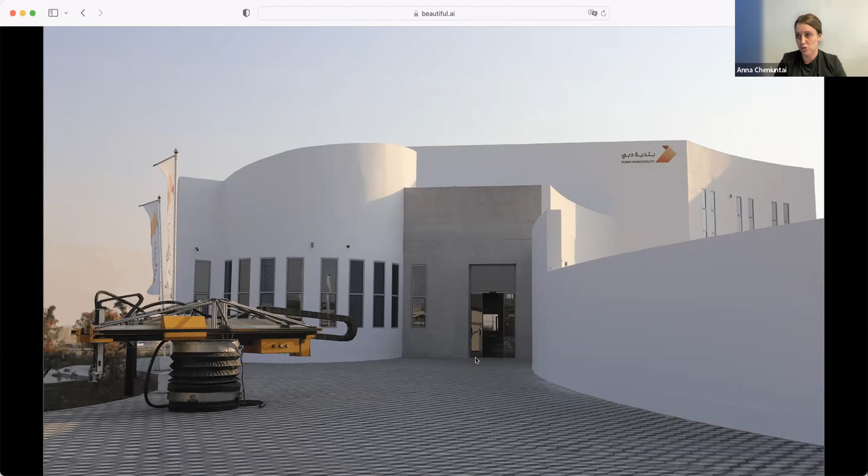This is another picture of that building in Dubai.

Now about the equipment that we have: we have a 3D printer and we name it Frank. As you see, Frank is pretty compact, comparable to the size of a human. It's not that huge gantry machine that you need a lot of trucks and like 10 people just to transport and deploy. In our case, one person can deploy the machine on the construction site and operate it to 3D print a house.

And you can see that this Frank looks a little bit different than the previous one that I showed in Dubai.

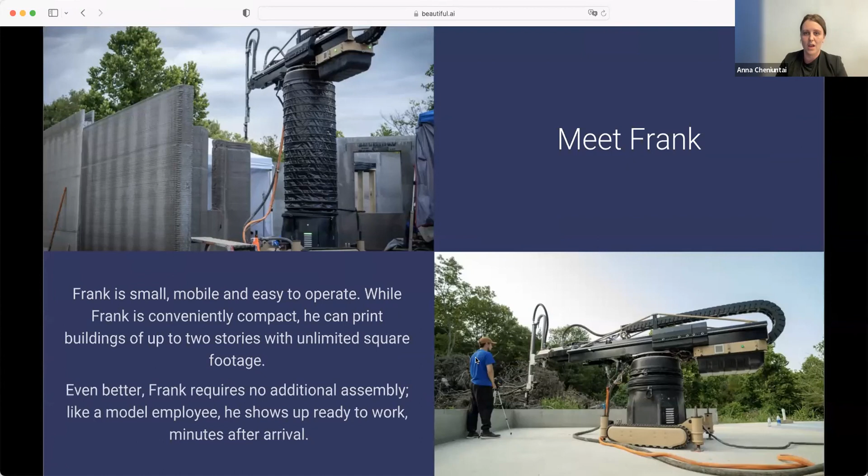Another piece of equipment is a mixer and pump machine, Gary. This is also proprietary equipment that we developed from scratch after our experience in Dubai, where we used a pretty standard plastering machine, and that was a nightmare. We realized that if you want to really scale this technology and 3D print a million houses, we have to create a special mixer for this technology. Otherwise, it will not be possible to scale it up. So this is Gary, and actually Gary right now also looks different. It's new Gary, I would say.

We're preparing right now for the product presentation in May or June when we unveil new Gary, Frank, and also our 3D printed model house. So a lot of things going on right now, and we're really excited to finally show everything pretty soon this summer.

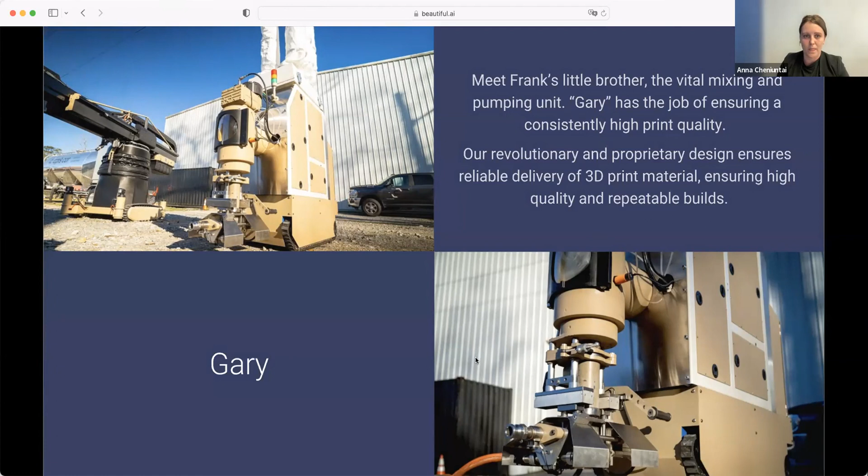Also, the really big difference from other equipment and other 3D printers in the market is our transportability and mobility of the equipment. This trailer and this truck are basically enough to transport Frank and Gary to any construction site, and it really takes like 30 minutes to deploy Gary and Frank on the construction site. So this is basically everything that you need. You don't need cranes, you don't need pallet jacks or a big 18-wheeler truck just to transport the printer. This is something we have been working really hard on, how to make this technology so easy to use. So it's basically kind of like a transportable tool for construction.

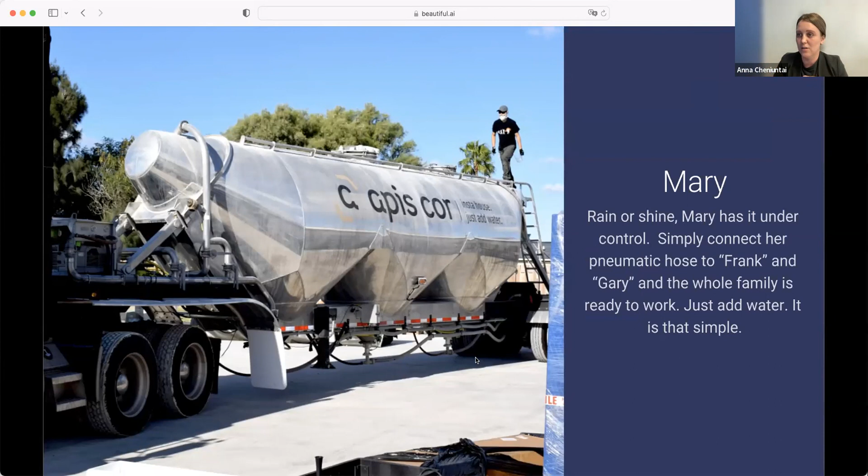And then another piece of our technology, it's Mary. Mary is a bulk truck that basically transports the 3D print material needed to 3D print the houses. Mary transports dry material, because 3D print material comes to the construction site as a dry substance, and then it's mixed with water in Gary, and then immediately goes to Frank. So these three pieces together basically represent a plug-and-play solution for construction companies, how to utilize this tool to 3D print houses and basically increase productivity, increase the quality of the builds, and also build durable houses.

I know that a lot of people also wanted to know about the 3D print material. The material we use is a cement-like mortar, basically concrete, but tweaked a little bit for the extrusion process, for the 3D printing process. It consists of cement, sand, and secret sauce, as we call it. The goal of the secret sauce is to make the material extrudable and at the same time durable, and have a fast setting time. So basically, this material is suitable for the construction 3D printing process, but also durable, so we can build safe and sound houses.

Also, the walls that we 3D print are reinforced, because I know everybody sees the walls and asks, where's the reinforcement? So we do reinforce the houses, and we do this the same way as it's done for concrete block construction. Trevor is the best person to talk about this later on.

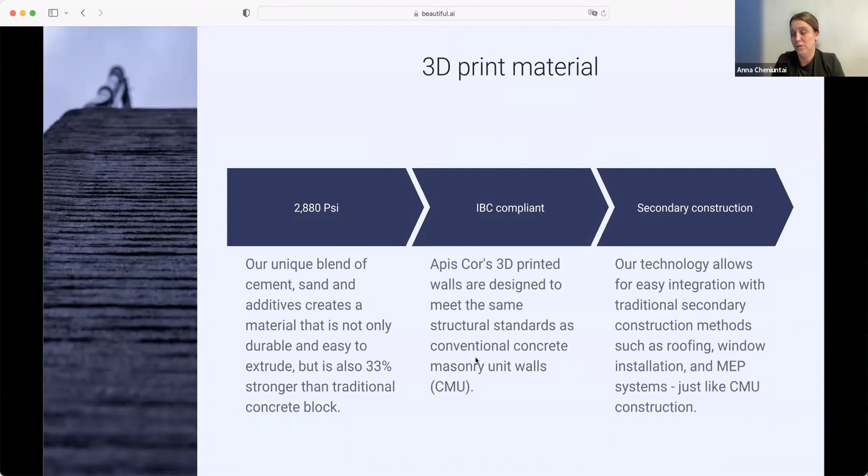This is also about the 3D print material. We did test it, and basically the walls that we 3D print comply with the building codes as for concrete masonry unit construction.

Now more about the market and the customer profile, and why we actually do this technology and for whom. Our customers are construction companies and home builders who really cannot keep up with the demand for new houses because they rely on labor, which is really limited today. We do know a lot about the labor shortages. It's also material shortages. So all of these factors today really make it hard for construction companies to build a lot of houses to keep up with the demand.

It takes a lot of time to build a house, a lot of cost, and the quality is not really consistent, so the budget and timeline are also not consistent and not predictable. These are some items that really affect the overall cost and timeline, and this is what actually makes construction so challenging and expensive, because all of the things change all the time and you cannot really control it. You cannot say, okay, this is going to take me 4 weeks and this amount of money. No, you can talk to your subcontractor yesterday and he provides you a price, but tomorrow he calls you...

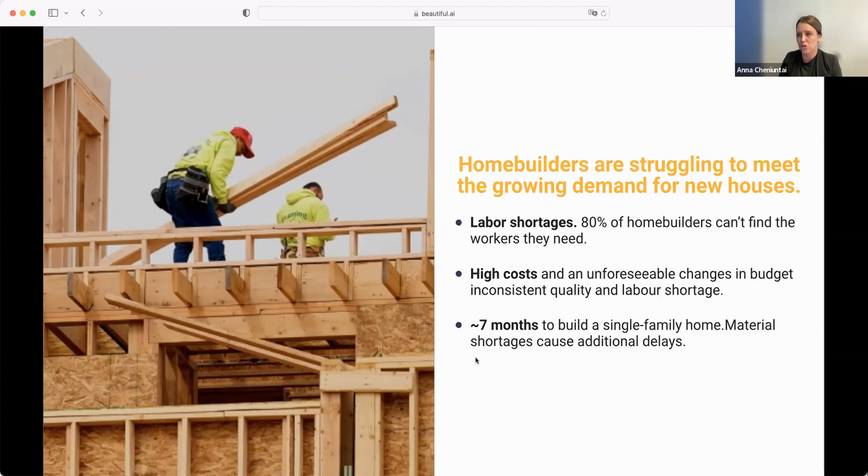...and says that his team cannot show up today, and he doesn't know when it's going to be continued. So construction companies just sit in this situation trying to fix it. It's a lot of hustle and a lot of problems with that. With the 3D printing technology, and especially the equipment and technology that we've created, home builders can build walls 9 times faster, and I'm talking about the walls.

If you expedite the process of how to build the shell of a house, which is the most important part—if you don't have a shell, you don't have a house, you cannot install roof, windows, work cannot start. So if we expedite the wall construction, the finished houses can be expedited three times. This is a huge game changer for construction companies.

For building the wall structure, we just need one person to operate the printer versus about 10 people of a concrete masonry crew on site to build the same structure. So it really affects the costs, operations, and time and management for that amount of labor, which is also not consistently available.

The complete houses can be cheaper up to 20%, but it really depends on the design, location, floor plans, and what exact finishes and materials you use. But it is possible to build a very decent, nice looking, durable, affordable house up to 20% cheaper versus traditional construction. And again, you just need a standard pickup truck and trailer to transport the printer.

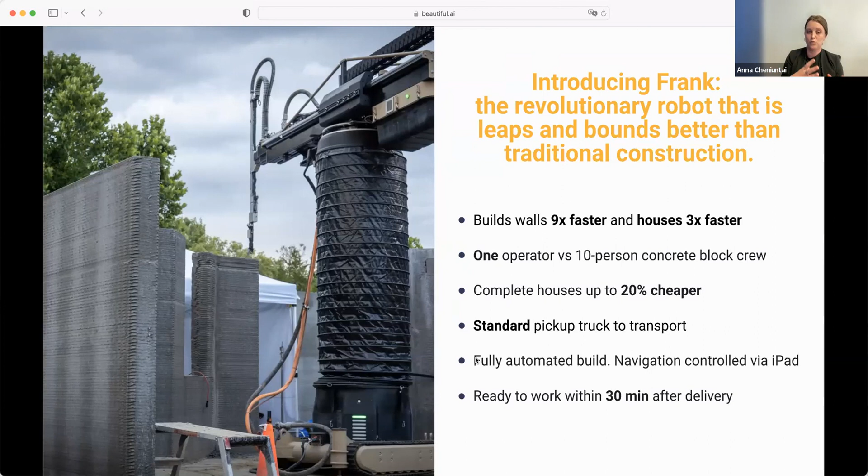Our printer is also controlled via iPad, so you don't need pallet jacks or 10 people on the construction site just to move the printer around. The printer is always assembled, so it comes to the construction site as an assembled piece, and within 30 minutes, it's ready to start printing.

Basically, by our technology, we bring automation to the construction industry. What also makes us different, and why home builders so far really like us, is that they're actually waiting for our solution to be available on the market, because they already did the research and understand the advancement of our technology and all the features that come with mobility, transportability, and ease of use.

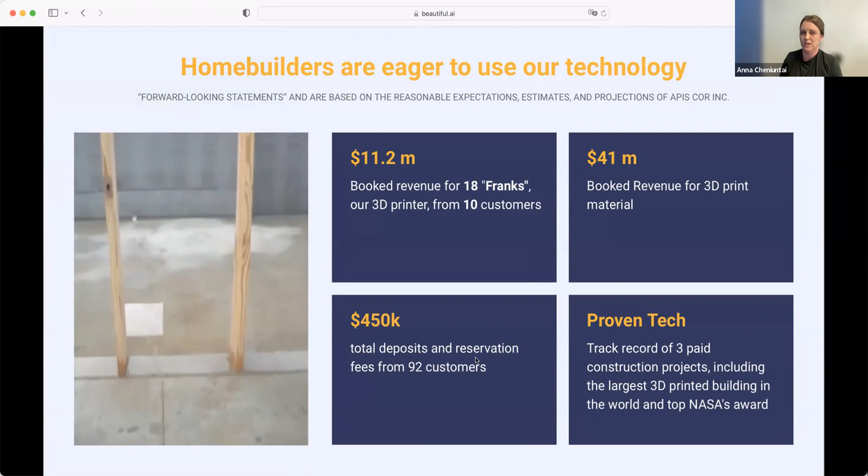Now more about the recent updates on sales and revenue potential. Again, these are projections—this is not part of the offering, and it can change anytime, it's not guaranteed, nothing like that.

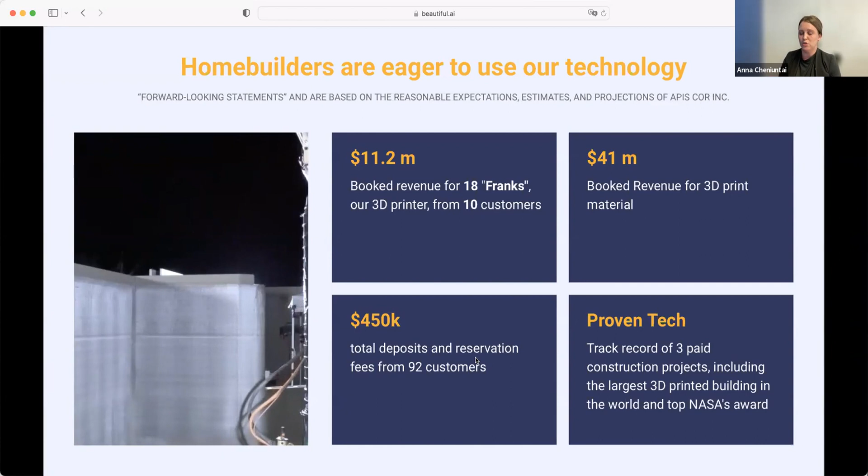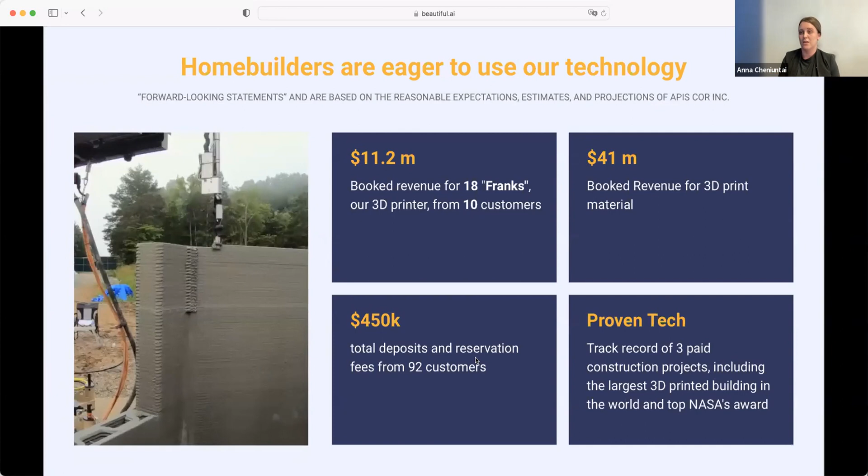However, we have been working hard to expedite the sales of our equipment. We started this in late January, mid-January, and so far we have received very good demand. Our customers are right now preparing their funds to place the order for the machine. They already did a lot of internal calculations and everything.

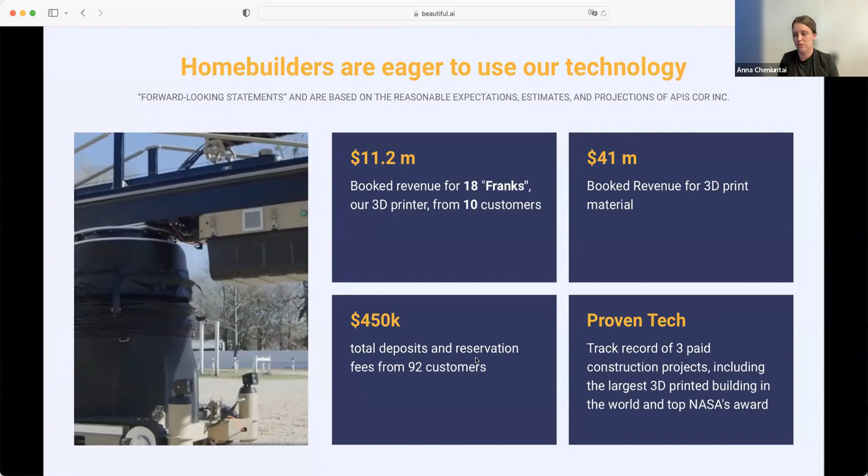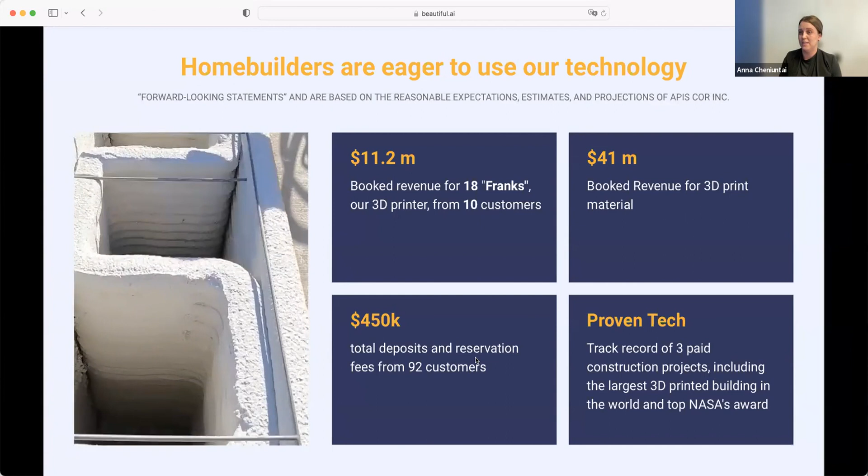So basically we have booked potential revenue for 18 Franks. And those people didn't just say yes, I will buy it—they put $3,000 of deposit for this machine, and they have to make the decision within a specific period of time. So this has been pretty solid traction so far.

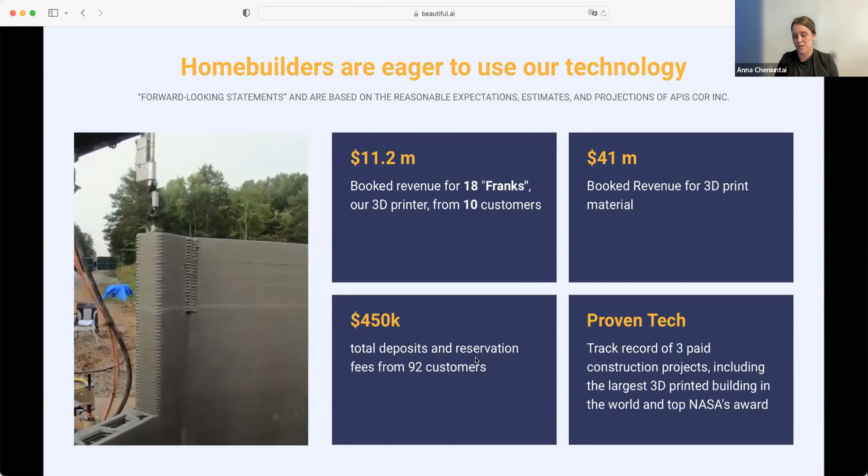But besides selling the printers, each sold printer brings revenue from the material that we're going to sell, because our business model is kind of razors and blades. Razors are the 3D printers, blades are the 3D print material. So every 3D printer sold or rented out brings recurring annual revenue from the 3D print material.

Approximately, if all these customers work even conservatively 8 hours per day, building let's say 3-4 houses per month, the potential revenue for that is $41 million. But again, it can change anytime, and it really depends on all the risk factors, and it's not guaranteed. Again, these are all projections we receive today based on the pre-orders and commitments from the customers.

Also for people who are new here, in addition to that, our traction also consists of the 2 buildings that we 3D printed in the United States so far, and also the paid pilot that will be converted to a commercial contract soon. So we have the proven technology. We already have the pilot projects with customers who put some money in before, just to have the reservations or priority for our product.

And those customers right now are being converted to actual revenue. So this is really exciting. This is proof that we don't just have technology that works—we have technology that customers want to purchase, want to use, and are pretty committed to making their orders and putting money in very soon. So this year is going to be pretty busy and pretty exciting for us.

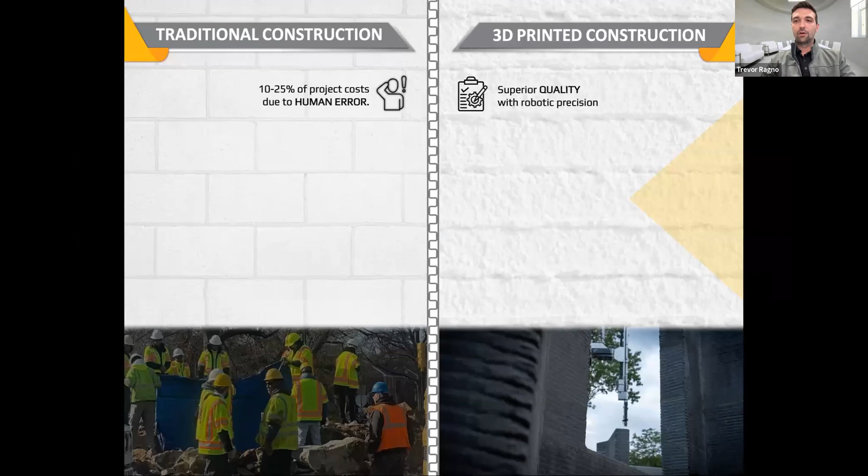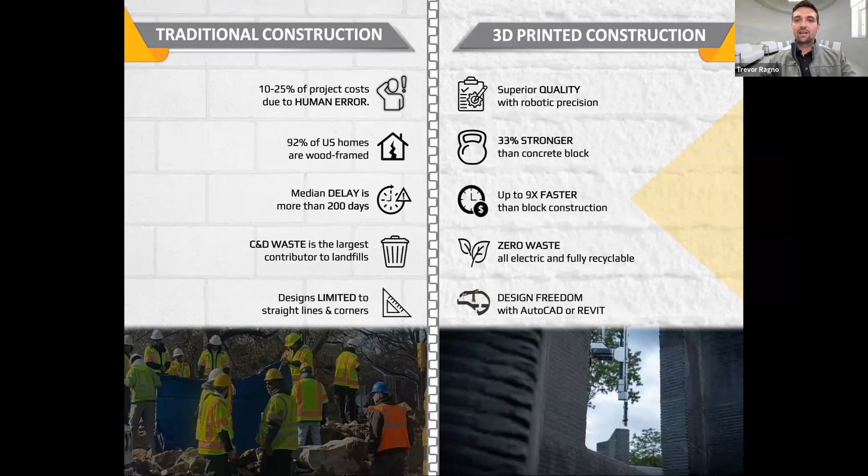Compared to traditional construction, Anna covered some of this—you're building with a robot, so you reduce a lot of human error. It's really strong material, not like wood susceptible to fire, moisture, termites, and everything else. It's extremely durable, and it's up to 9 times faster than block construction. But just as importantly, we know down to the second how long it's going to take to print a building before we ever go out on site, allowing much better schedules and faster delivery when scheduling our trades.

Money isn't the only green at stake here. It's a huge benefit to the environment when we're using something that has zero waste. It's all electric and the material's fully recyclable. My personal favorite is that we no longer have to build in straight lines and hard corners. We can build a beautiful curved building, or straight lines and hard corners of course, but we can build just about anything for the same cost.

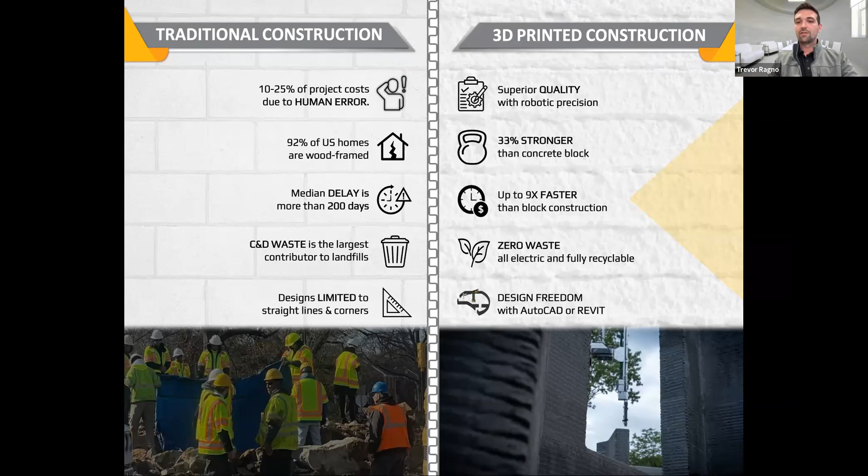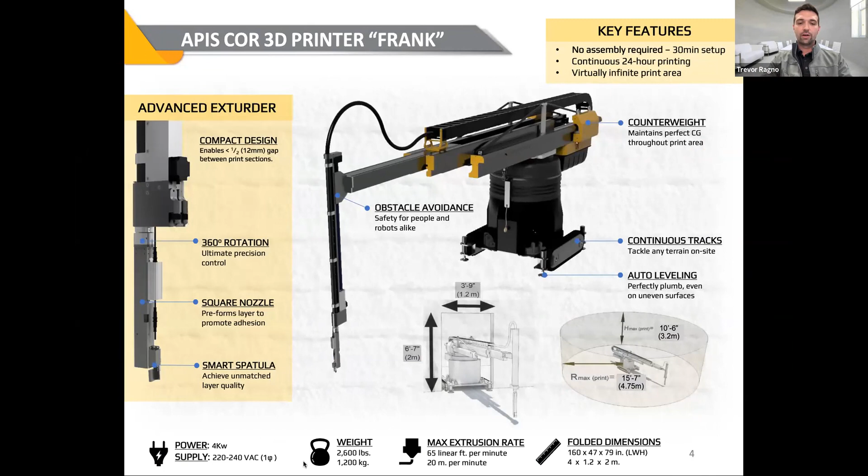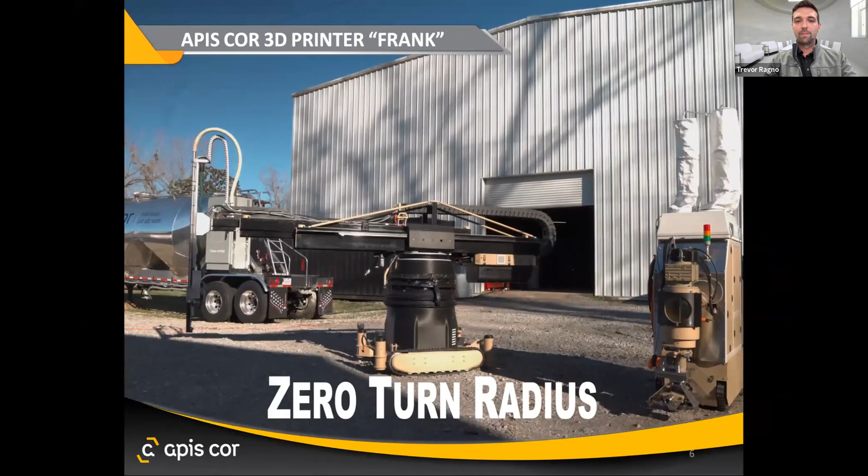I know somebody asked about the weight of the printer—that's down here. We're looking at about 1.2 tons between the printer and mixer. Just wanted to address that question quickly, but this is Frank.

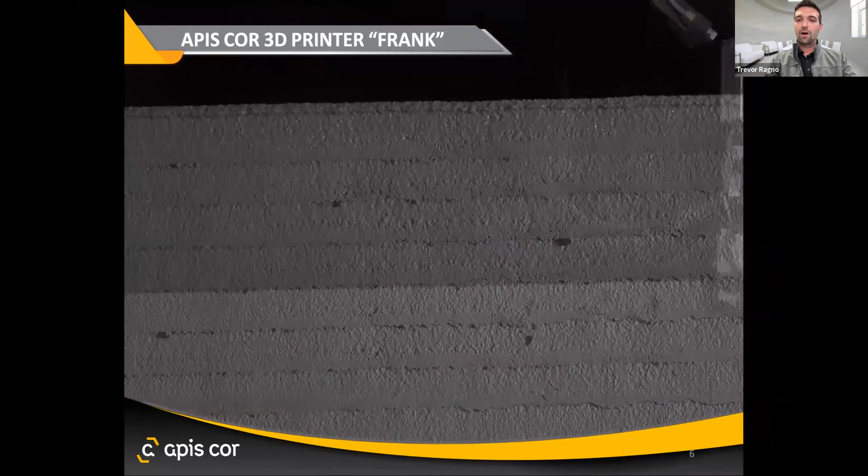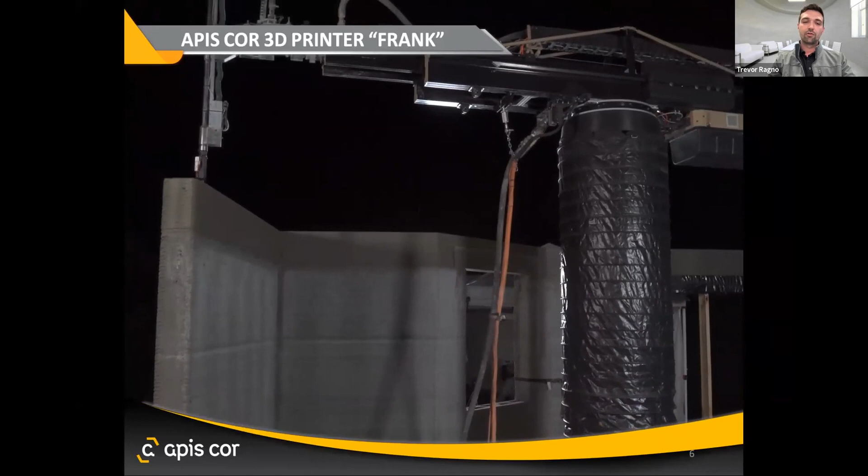Frank is a truly amazing machine. After seeing a lot of the others in the industry, you can see that spatula come up around the corners. We have really good tight corners that we can produce just as easily as straight lines, but we print in multiple sections, and these control joints where the sections meet—required by code—ultimately come down to the quality of the wall we're putting out. There's really high quality, high tolerance, and this helps speed things up and reduce cost.

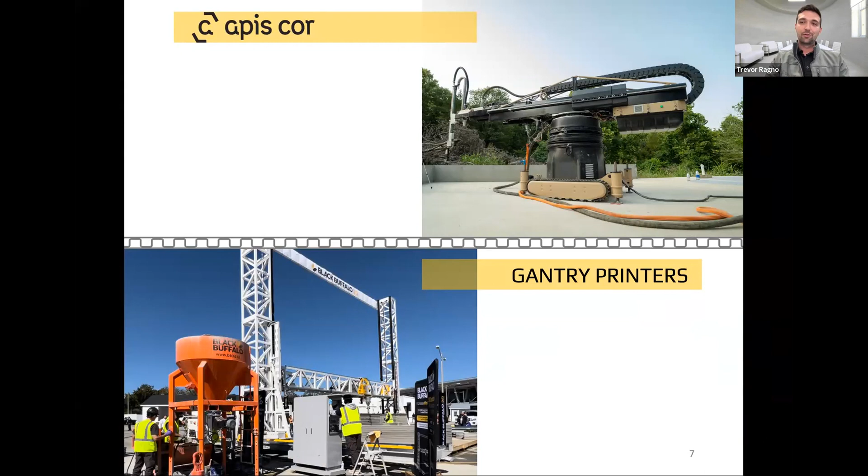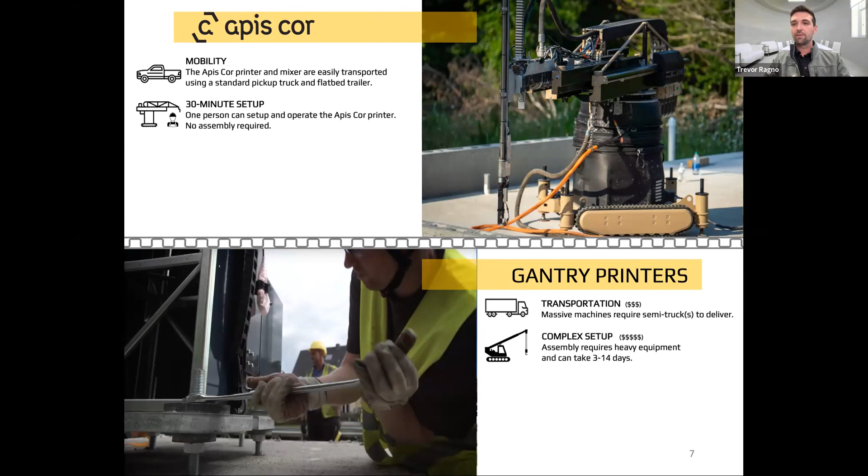So we get the difference between traditional construction and 3D printed construction, but what about us versus other printers? Anna already mentioned transportation via truck. You don't need to be a mathematician to figure out it's cheaper to transport something with your truck and trailer than to pay a commercially licensed truck driver to move 1, 2, maybe 3 trucks worth of equipment to set up those large gantry printers. The machine arrives fully assembled, and a single person can go from trailer to first layers in 30 minutes. Whereas gantry printers have a lot of setup involved—it can take up to 2 weeks depending on the printer. There's different models, but a lot of assembly is required on site.

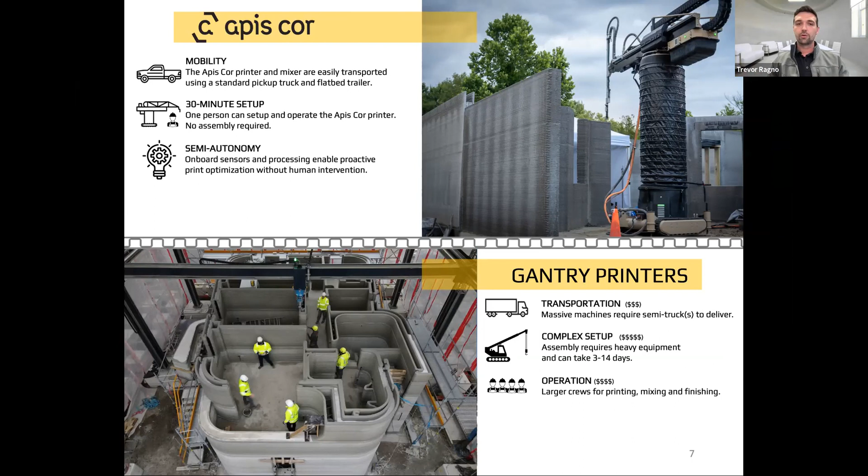In terms of operation, by having this ecosystem of multiple robots working together—a printer, a mixer, the bulk truck—we're able to reduce a lot of the human labor needed, even compared to other printers that generally have a plastering machine mixing while crews hand load material. Smaller crews mean reduced cost and reduced chance for human error. And of course, scale—this Frank might be small, but you can print buildings of virtually infinite size. With gantry printers, you can only print inside the box, so the bigger the home, the bigger the printer.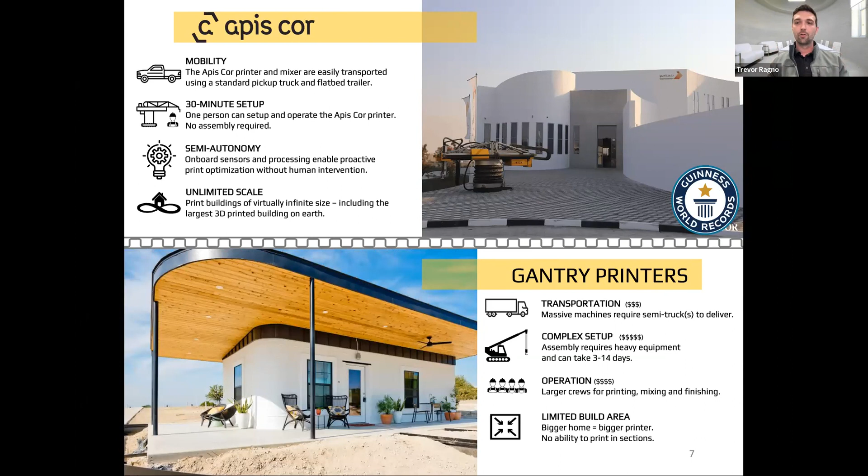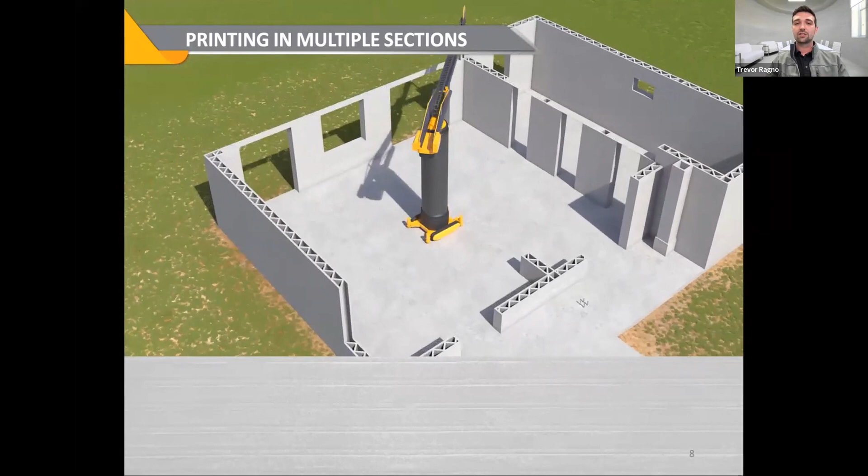Talking about printing in multiple sections, this animation shows Frank rolling off the truck and printing section 1. Now he moves to section 2, and you'll notice where these two sections combine, that's an abutment or control joint—required by code. Usually you need a cement saw to cut those in, which is dangerous and expensive, but we're doing this on an automated basis.

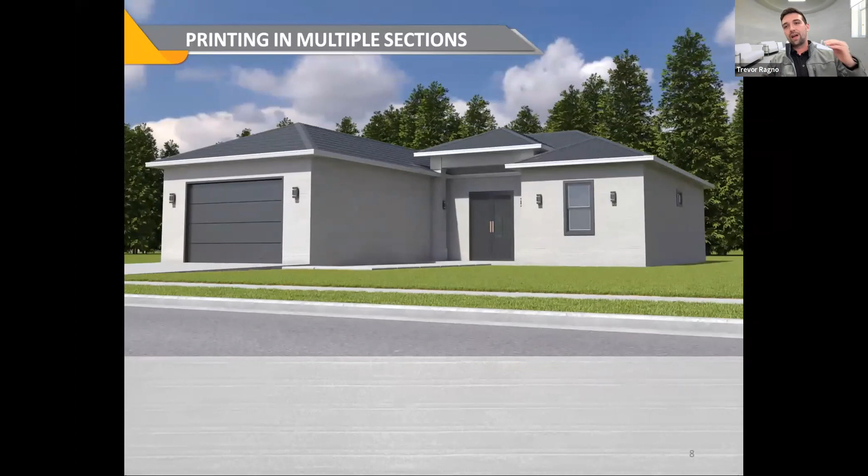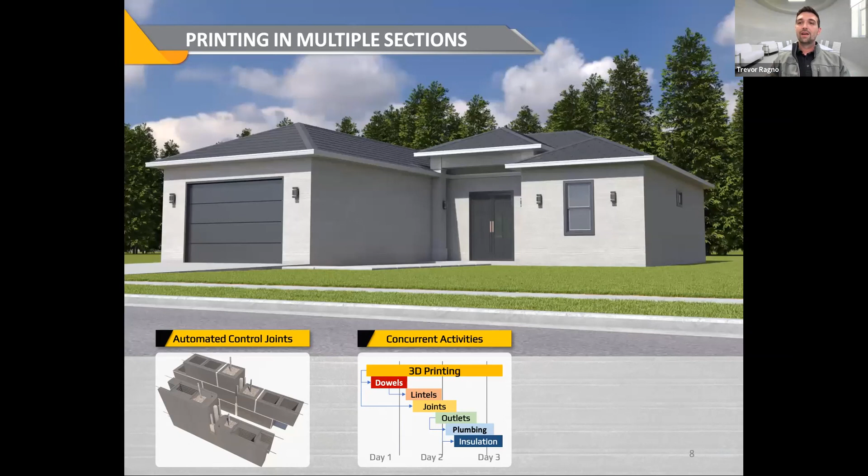Another big thing is that since the printer moves from one section to another, unlike a block crew doing one course at a time, we're able to have a lot of overlapping and concurrent construction activities. For example, the printer can still be printing a section of the home while we're putting in lintels, outlets, rough plumbing, windows, and insulation—secondary activities that typically have to wait in the construction timeline. These overlapping activities save time and ultimately save money on your project.

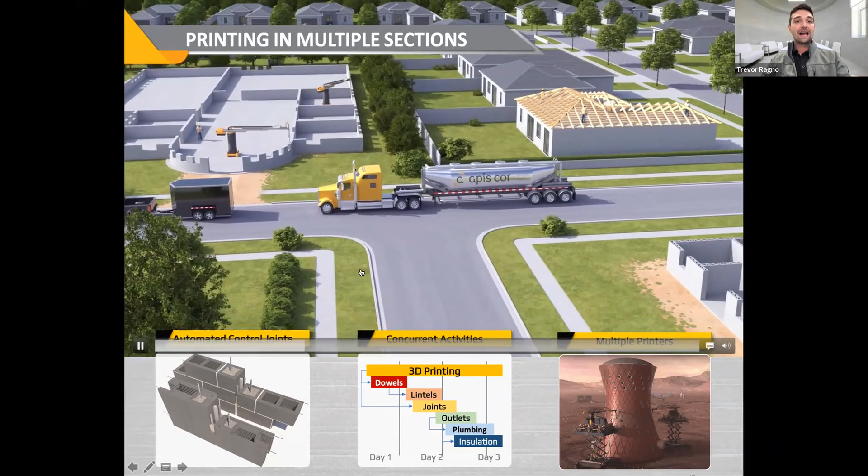And lastly, it allows us to use multiple printers at the same time, even on the same building. Let me show you what that looks like. Up here on the top left, you can see two printers actively printing the same structure at the same time.

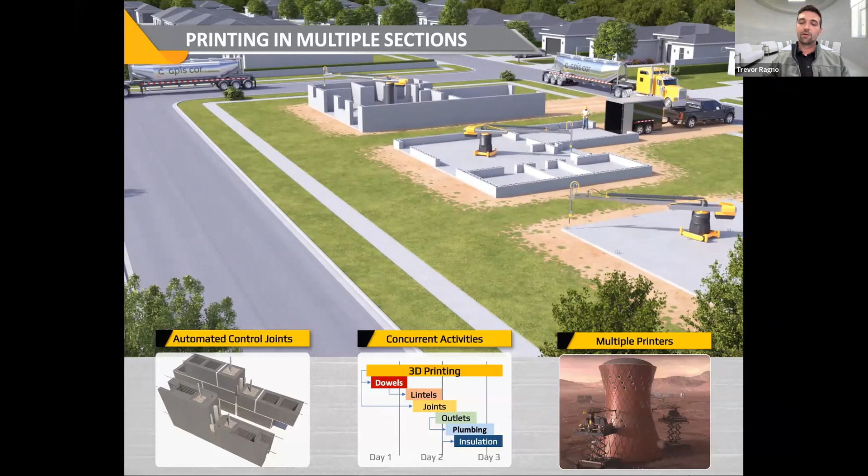It's something we can already do. But at the same time, you're able to, as one builder, have multiple printers building different homes next to each other, for example. This is a great way to show how scalable this is for businesses that choose to use the Apis Cor printer. Scaling up production is as simple as getting new machines.

Our big secret to how we're able to get permits and integrate secondary construction so easily is because we decided, why reinvent the wall? On the left side of the screen, you see a concrete block mason and a concrete block machine. On the right side, you see a concrete block machine, and that same machine happens to be the mason here. So the walls are actually identical.

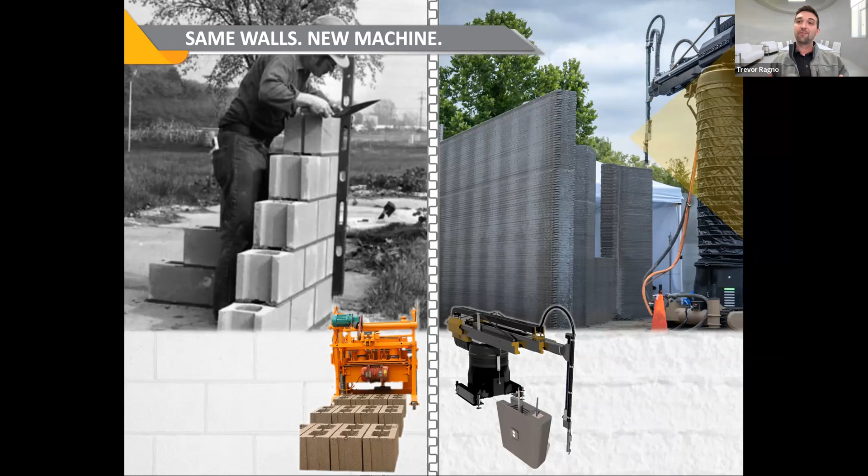This is kind of weird to wrap your head around, but if you take a concrete block and set it right on top of one of our walls, all the webs match up, all the thicknesses match up, everything is identical. Let's look inside these walls so you can see what I mean.

An architect or engineer essentially already knows how to make designs for a 3D printed home because it's virtually the same, with the exception of those two little annotations. Very quick and easy change. So whether you have an existing set of plans or want to convert that, or design something completely new, it's really easy to work with any architect or engineer to do this kind of thing.

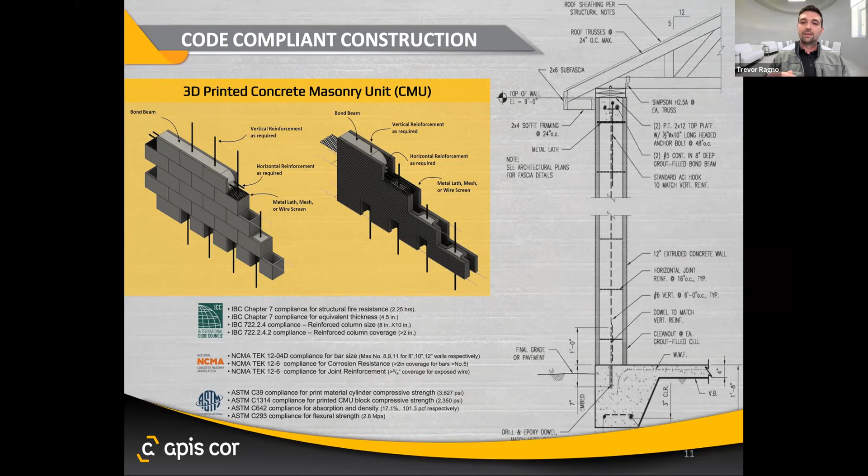But you might be thinking, all right, that's great for permitting. It's allowed us to really blow through all those barricades. We've never had any problems obtaining permits, and it helps with the design aspect. But what about secondary construction? This is a big question we get from a lot of people, and ultimately everything can be done in the exact same way as a concrete block home.

Thankfully, we have some things that can help make it a little more efficient to accomplish the same thing. For example, putting outlets in while the material's still relatively fresh, so it's easier to cut the outlet boxes into the walls, or installing insulation inside the wall cavities instead of putting foam board and drywall on the inside. Our tolerances for windows and doors - it's a robot, so we can build those tolerances in very accurately, meaning there's not as much shimming and work to do after to trim and pretty everything up. It already comes out of the printer looking great.

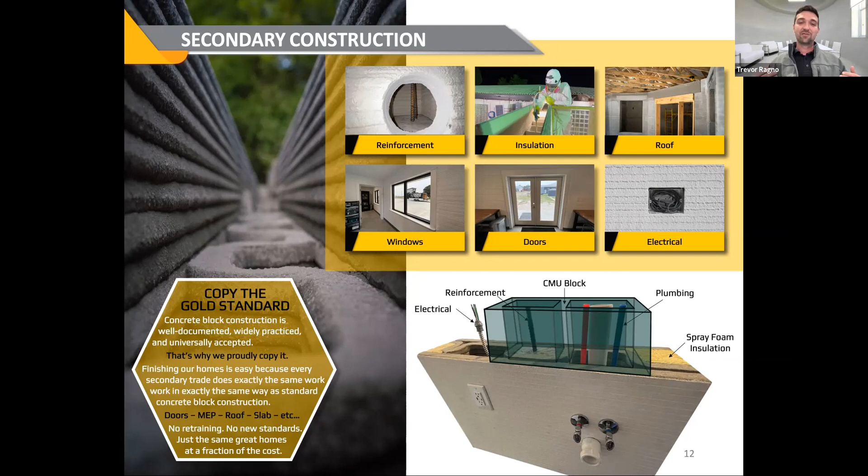Down below here, you can see how some of those things look. If you're familiar with concrete block walls, again, it's virtually the same. We've copied the gold standard of construction.

Now, if you're interested in learning how to design 3D printed walls, we have plugins for AutoCAD and Revit that make it very quick and easy. We have a video on our YouTube channel and information in Apis Cor University that show exactly how to make G-code, but essentially it's a really simple process using the tools architects and engineers are already familiar with, AutoCAD and Revit.

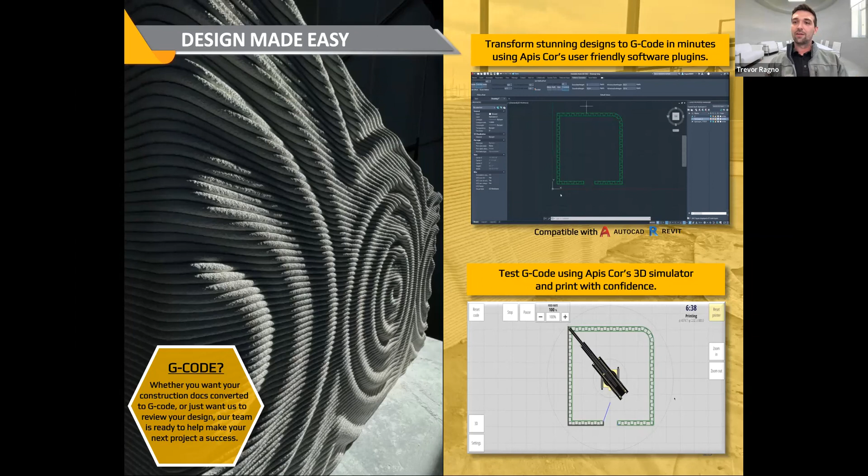And instead of testing that for the first time on the site, we have a simulator that allows you to test it on the computer before ever stepping out onto the construction site. So, we can verify that everything's going to work well when we get out there.